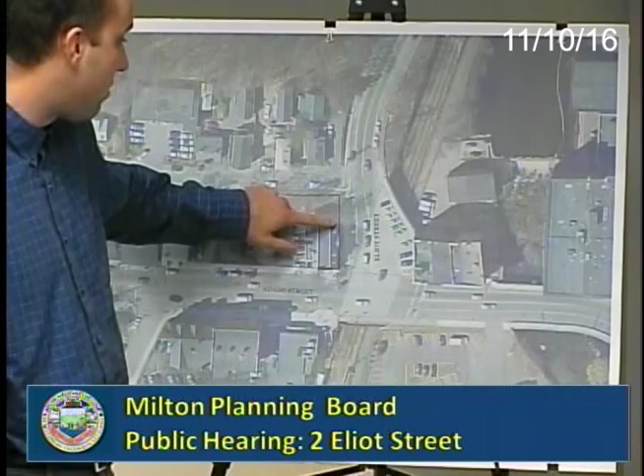So the solution we came up with when we were doing the conceptual design phase, what they actually ultimately wanted to move forward with, was we moved the ADA space here, provide the accessible aisle here, we push this back a little bit to make room for it, and we provide a path along the side here to get from the accessible space to the door, an accessible path.

There's an existing retaining wall here they're going to break through, and it also runs along here too, but they're going to maintain it. This area now is a bricked landscape courtyard that doesn't really have access from either side. I think it's just kind of a dead area that was probably formerly used.

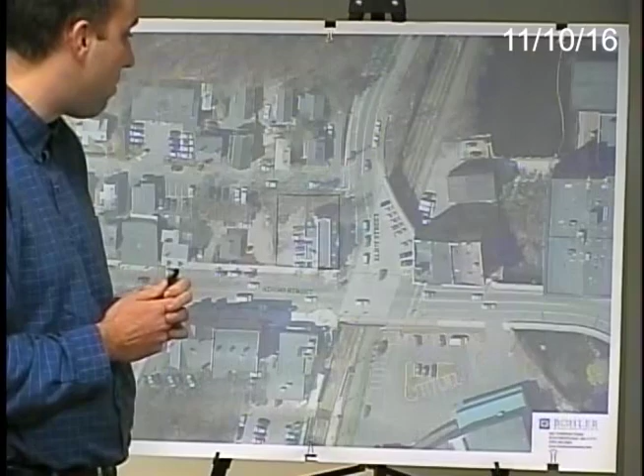Pull up the design plan just to show you some of the details.

So here's the front main entrance, and here's where we're proposing accessible spaces. We're going to put a wall along here to make room for the spaces, move the trash enclosure, and provide a ramp coming up, providing stairs at the rear entry.

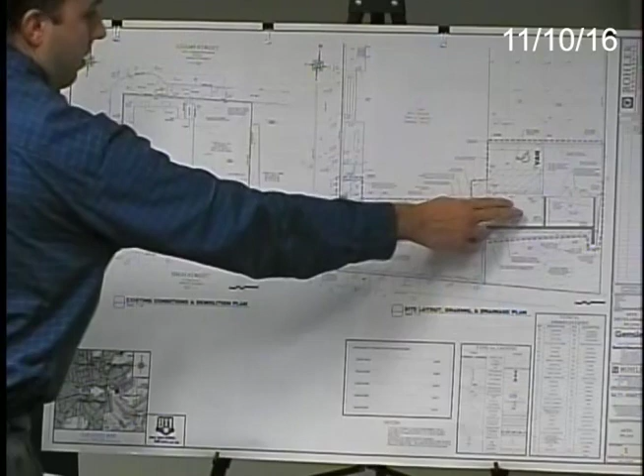And then basically a sidewalk in compliance with ADA requirements coming along the side, and then connecting to the front entrance. Work associated with it just includes the wall, like I said, the trash enclosure.

This also provides a slight extension of the paved parking area, about 5 or 6 feet, which actually will serve the project well, because right now there's an existing dumpster enclosure right here, which kind of prohibits people from parking in one of the spaces they do have. If you've ever been in that area, it's quite tight maneuvering through there.

As far as other work, a chain link fence on top of the wall. The wall will be a segmental block wall. They're proposing a gray split-faced wall. I got a picture of it if you wanted to look at it.

Basically, this is the same application, but a segmental wall like that will generally match the color of the poured walls they have now. It'll have geogrid reinforcement in the back.

And the dumpster enclosure, currently it's chain link, but it'll have CMU block walls along the side. It'll have a chain link fence, screened fencing gate along the front.

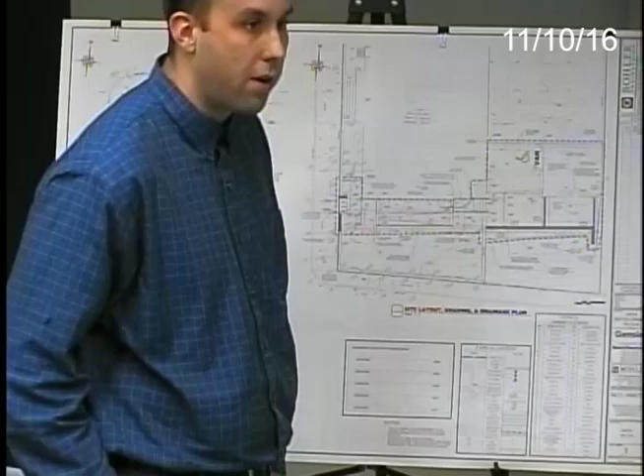You showed us quite a nice picture of a wall, and then it seemed to me you talked about a poured wall. Oh, so the existing wall is a poured wall. So under existing conditions, there's a poured wall here, and a poured wall that comes through here.

Yeah, they're going to break this poured wall here so that we can bring our path through. And then any proposed wall, which is basically this wall here, and then the two sides of the trash enclosure, will be a CMU block wall.

What sort of wall? A concrete masonry, basically a block wall, similar to something like this, a Versa-Lok. Something like that, this is a Techo-Bloc. The wall is actually behind you, Alex.

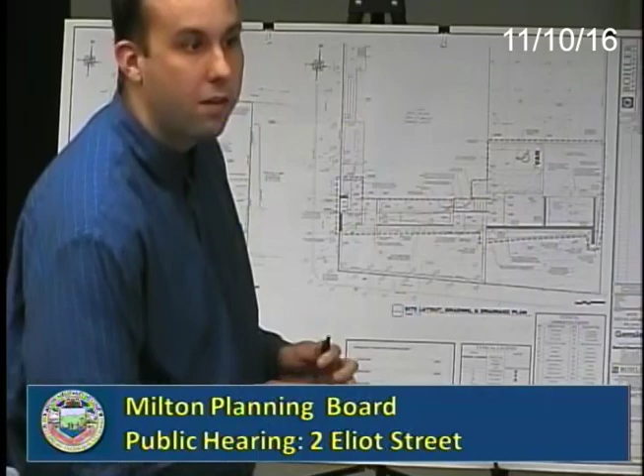Yeah, to the right next to the building, about 5 feet off of it is the existing poured wall. What's the material of the wall that's next to the sidewalk? Is that stone? I believe that is stone, but to be honest, I can't quite tell. It has a brick face to it. It's concrete with a brick face.

And what about the Eliot Street portion of the wall, same? Yes, that is. And is that capped? That's not chain link fence. No, that isn't changing, is it?

That wall, no, a little bit, so that we can get our path through. It's going to go wider. The wall parallel to the side of the building, yes, that's not going to change. The wall along the street might get changed a little bit.

So if you're looking just to the right, there's a little piece there. Sure, put it in, just so we, at least I can look at it. So our sidewalk's going to come up this way, and then over here, this wall, you can't tell, bends back a little bit, so they're going to get rid of that, so they can bring their sidewalk through.

Oh, thank you. So when you say the wall in front's going to change, is there a little parapet there or something? Yeah, there's a gate here with a step. They're going to get rid of that, and they're just going to extend the wall to match the existing look. And they can actually match this existing iron fence and the little ornamental piece on top of it for the few sections they're going to replace.

So basically anything from the corner of the wall is parallel with the building and parallel with the street. From that corner, you have an index finger on... yeah, that will be over to my right or your left, nothing's really changing.

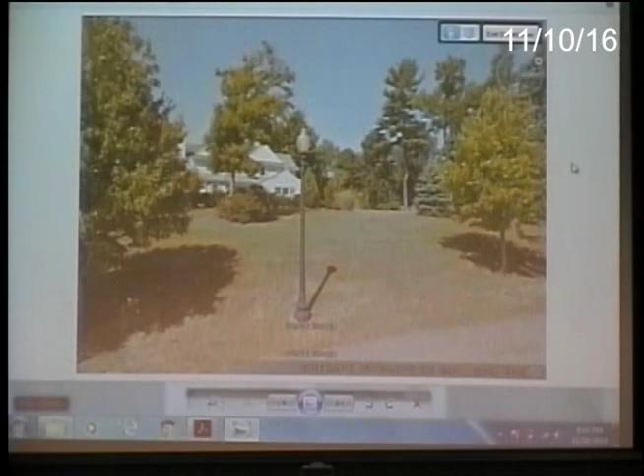So what we've done is taken that light and provided a spec of a similar light. It's actually, I think, the exact light, because he gave us the invoice of when those streetlights were put in about 10 years ago, and we went onto the website using those same codes. So this is an antique streetlight, and you can see it's a clear acorn fixture.

It looks like the one that was provided to us, and we also provided a street pole spec. The fixture is approximately 3 feet tall in length, and the pole is 13 feet tall. We've added that information onto the plans.

Jack Calabro from the town is someone we've been speaking with, and he does have one remaining comment that we're going back and forth on, but it's really about the controls of the lighting. He was interested in how it was being set up in terms of controls and the meter and things like that. I think they're more construction-related items, but we'll continue to work with him on the setup.

Where is that positioned relative to the sidewalk? Is it on the same side as the sidewalk? It is. If you go back to the exhibit, we did locate all of the lights on the sidewalk side of the street.

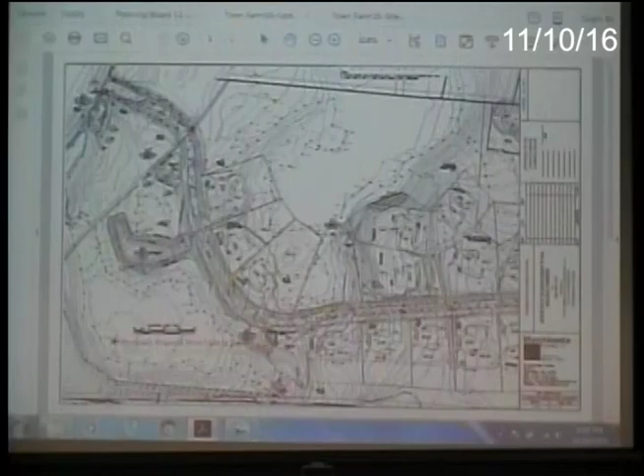Did engineering have any concerns about the mounting location? Sometimes they like them to be up a little bit, like on a concrete pedestal, for snowplow purposes, so as not to have damage. No, he didn't comment. These are direct bury light poles, and I think if you go back to the example, those are direct bury as well.

They are. So what we're proposing is definitely similar to that. Okay.

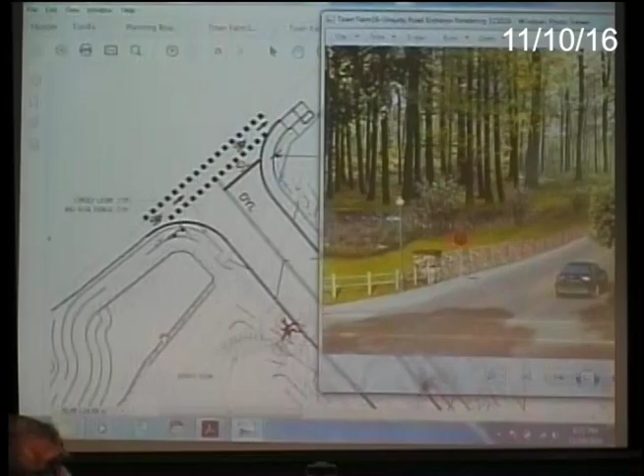I guess what I'm getting at is I like your picture better than what I think I see here in the drawing, but you're telling me that that's it. Well, if you don't mind, Tim, moving that back to show the whole image again. I do appreciate having the rendering, I think it's most beneficial, because we talked about this at our last meeting.

I'm wondering, on the right too, trying to do the same thing Mike's doing on that side - we've got this retention area here, right? And is that a wall around it?

There is, and should be, a detention basin here. I'll tell you, from an artistic rendering standpoint, it was difficult to draw. We were having some trouble with this little foreground area. Everything is in the right place, but it was difficult to get the grade to respond the way we wanted it to right in there, so we took a little creative license - that's the spot I'm referring to.

Okay, so how much is it dropping down in that location? I would have to defer to Mike on that. I'm going to have to grab my plan, but it's about 3 or 4 feet.

I think the wall is on the inside of the basin, so if you were on the street... I'm not sure if he's got the wall on the backside also. Yes, he does. So you would see down below the road, you would see a little of that wall. That basin, with your scale, comes to probably significantly less than 20 feet, probably 10 feet from that pier.

So Mike, if you go back to that picture, I wanted to say one thing about the scale on that drawing. Where the car is, if you go up more to the top, that road is fatter at Unquity Road, but as you get up to the top of the hill there, that's 20 feet, that width that's up there.

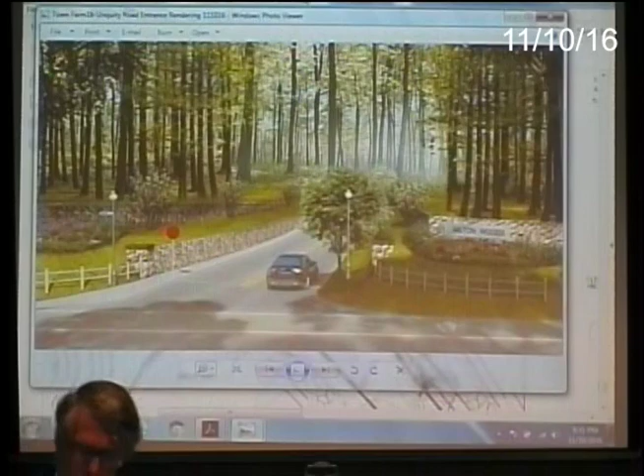Yes. Again, I think your rendering is beautiful, it's just - I like to say in the business I do, we like to under-promise and over-deliver. And with no basin there, when there is a basin there, and maybe I don't visually grasp it on the left, but it seems like you might be over-promising and possibly under-delivering. Well, I can certainly appreciate the concern.

I don't think we are. I know we built this in CAD and it really is dimensionally correct. I'll tell you, partly I think a lot of it was because of the angle - getting that basin to read correctly in this rendering was a bit of a challenge, and I apologize for that shortcoming on our end.

So it seems to me maybe it's foreshortened a bit this way, Mike, it's kind of compressed this way. And if it's higher, like you said, it shows what represents the stone wall, so you'd see another stone wall there in front of the Milton Woods sign.

Yeah, apparently they're telling me it's higher, that's why I think it appears foreshortened this way, because what we see here seems like there's more room between the flowers and the fence than what appears in the rendering.

The basin in depth from the road going back is like 25 feet. So what you're saying is, in the photo, it looks like it doesn't even fit there. Yeah.

If I could just interject, the road being at 42 or 43 Unquity Road, and the top of the berm being 46 would probably be the height of your eye if you were standing on Unquity Road. The top of the wall on the opposite side, the one you'd likely see, is also 46, so the front berm is going to screen the back wall a little bit. Once you get up on the road, you'll start to see the wall on the far side as you approach it. Does that make sense?

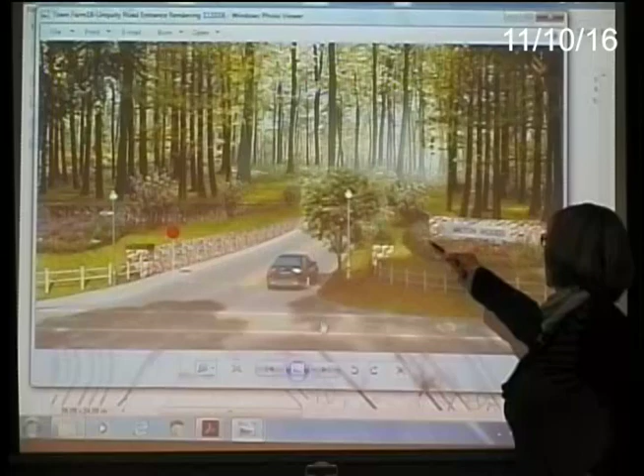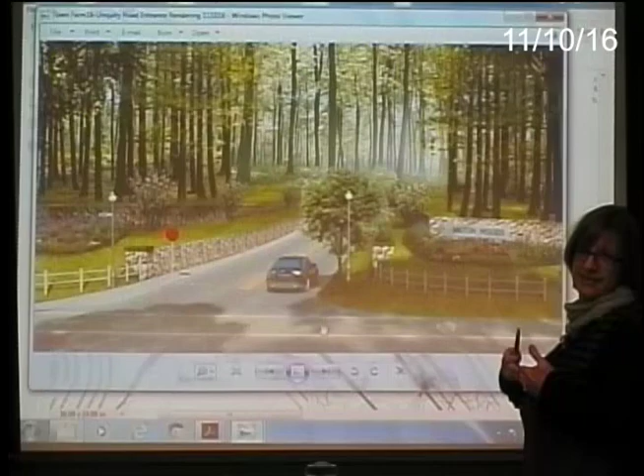I think graphically, the wall is well behind - based on the plan, maybe your flower line might be here and your wall might be in here. So in this zone might be where your basin is, in terms of the foreshortening. The basin's right there - I'm thinking the top of the wall would be right at the bottom of that landscaping you're seeing. Right in there, yep. So this would be where the basin is.

No, forward of that. Forward of that? Okay, that would be the far wall. I think that's the point you were making earlier, Cheryl - from the fence to the wall that says Milton Woods, the basin is 25 feet in depth there, but that Milton Woods sign is back about 50 feet from there. It's like it's depth foreshortened.

But the fact that the basin's missing is kind of a missing element of that visual rendering. Well, you're suggesting the rendering is a little hard to justify based on the plan. Well, no - what I see in plan view here, some elements are missing. And when you show something like that to people and they say 'oh, isn't that beautiful,' which it is, then the day construction's done they're saying 'well, I don't see a pond in that picture, and you've got a pond there now.'

Well, the question really is whether that edge can be moved over a little bit. So Tim, if you can go back to the plan - it makes you wonder if you can just change that a little bit. Is it something that does... kind of... I don't. Really can't do that, no.

That dimension - there is 5 feet from the pier at the end of the wall to the wall at the basin; it's 5 feet between them.

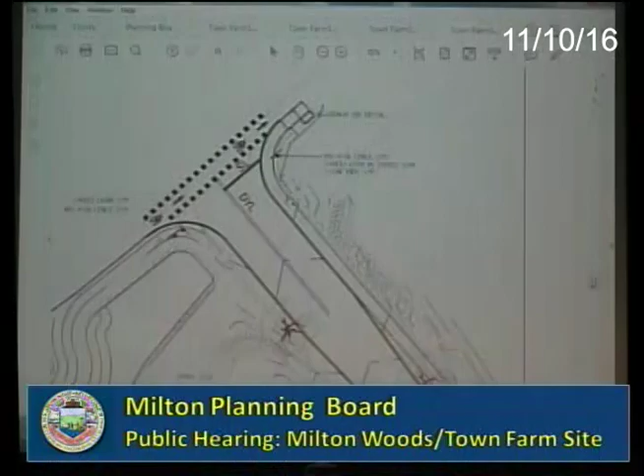My feeling is if you have children waiting, and you know how young children are, they're not just going to be sitting here patiently on the bench - they're going to be bouncing around, in the bike lane playing while they're hanging out. I just feel as if back in here is really a better spot. The bus could still stop where the bench is positioned now, but I think what you're saying is you want to encourage them to congregate a little more interior. More safe, right.

Back in there, yeah. What did you do at Woodmere that you mentioned? Well, I think they actually wrapped the wall around it. Yeah, the wall comes down at the end - they wrap the wall around, and there's an area behind the wall.

Is that the name of a street or the name of the development? That's the name of the development. No, it's not Woodmere, it's Beechwood. Oh, it's Beechwood? All right, sorry. Beechwood Lane. But what did we do at Woodmere? We didn't - there's no buses at Woodmere.

Oh, well, Woodmere was designed to be an adult community, 55 and up. I'm sorry, I got the road wrong - it's just a little bit down the street, Beechwood. We can look at that.

Okay, why don't you keep going? Okay, I'll keep going down the list here.

Number 4: I mentioned previously that on the full-size set of plans before you, we did incorporate the additional bike signage that Mr. Michaud, who was here last time, spoke about.

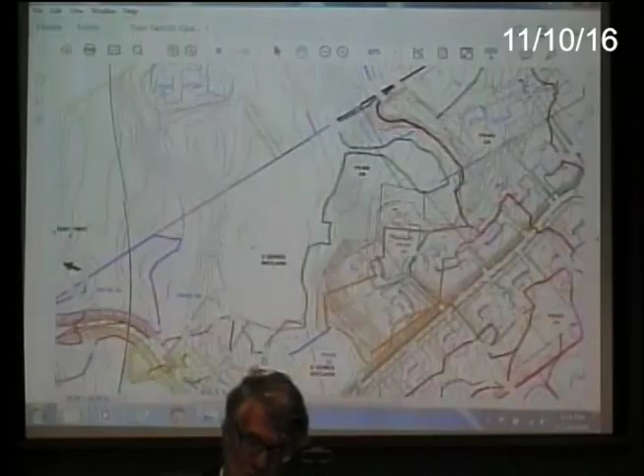Long-term, so there isn't a problem down the road - this is very common in most developments nowadays. Especially when filing a notice of intent with the Conservation Commission, we come up with an O&M, an operation and maintenance plan, which is what you're referring to. These basins get inspected by a qualified person periodically - I think it's quarterly for this basin, and we mow the sides of the basin, I think once a year, as expected in the O&M.

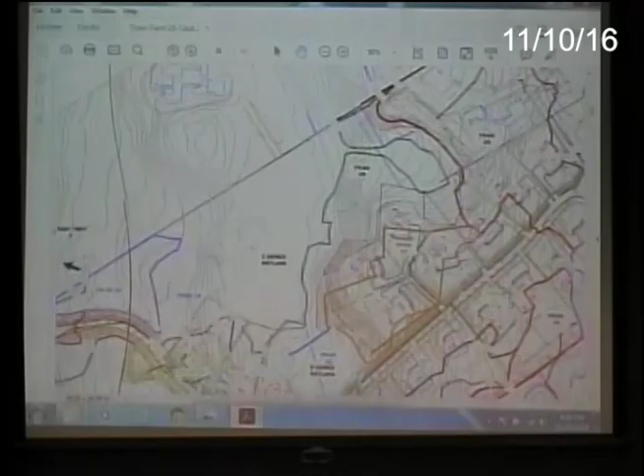And that inspection's done by someone associated with the Conservation Commission? It's hired - a professional like myself, or someone qualified, hired by the HOA, the Homeowners Association, to do these inspections and report to them. It also gets copied, I believe, to the Conservation Commission. So there's someone outside of the homeowners association? Okay, all right, thank you.

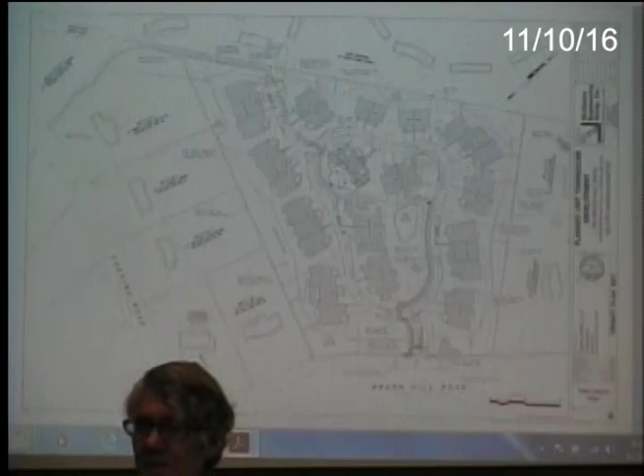So they're looking to do the first two buildings on the left-hand side, and they're looking to not do the affordable units at this time. But no, Cheryl, they're trying to make it look nice for us. It has nothing to do with anything else. Well, my concern wasn't that they were trying to delay the affordables. Those are the two foundation permits that Bo was just saying, those two buildings in the back. Signed off on those about 2-3 weeks ago.

I wish sometimes people would just give us their real reasons, other than the fact that they're going to make it look nice for us, and that's the only reason they want to do it differently. Out of the kindness of their hearts. It has nothing to do with anything else, financial or timing. Look, this is part of the special permit. It's how you drive by, and when you see it, it's gonna make it look nicer.

Where is this requirement? Is it in some attachment to the permit? It was one of the documents they gave us, right? They gave us a construction management plan, a sequence of construction, like a schedule. Yes, it's in the construction management plan.

Okay, and so the question is how one amends the construction management plan, and why don't we discuss that next time, after December 8th.

We're not going to do it tonight. I just told them I would present it, so you can think about it. If you don't like it, that's fine. Tell them we're thinking about it, tell them to come up with more explanation. No, tell them we've put the planning staff on this and we're waiting for a report. I think maybe I'll wait for the report to chime in.